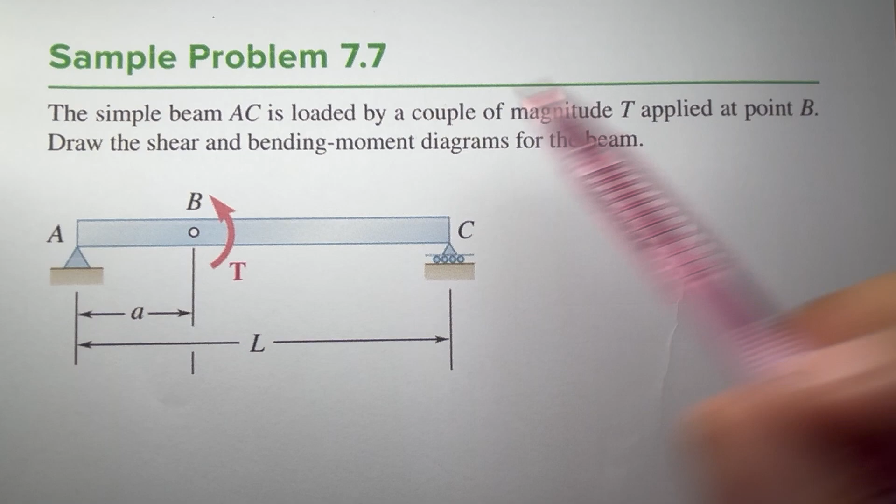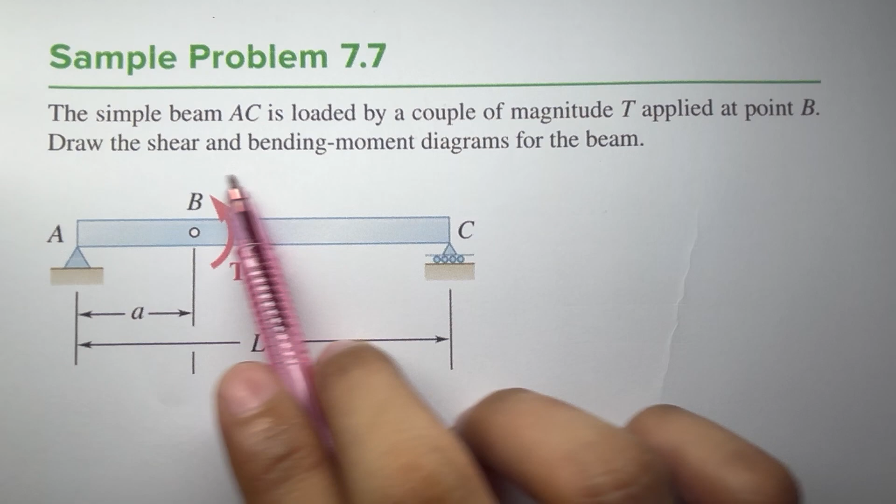Now let's have our last example. We have sample problem 7.7. We have a simple beam AC that is loaded by a couple of magnitude T applied at point B. Draw the shear and the bending moment diagram for the beam.

First we need to find the reactions at the supports. We have two reactions. We have no reaction AX here, since there's no force along the horizontal. So what we have here is just CY and AY.

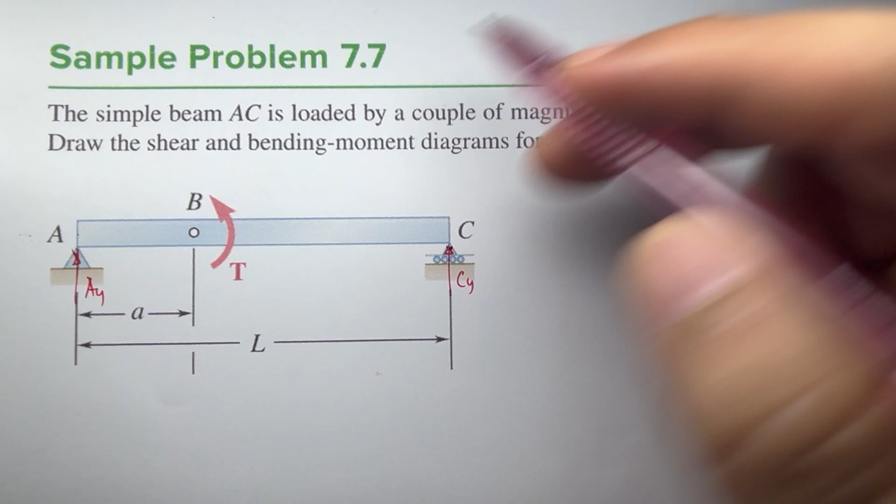To get CY, we can use summation of moment at point A. If we apply summation of moment at point A, counterclockwise positive, we have our T and also our CY, all positive. CY times its moment arm, which is L, is equal to 0.

Therefore, our CY is equal to negative T over L. Therefore, it should be directed downward.

How about AY? For AY, we have summation of forces along Y, positive upward. We have only two forces here. We have AY that is directed upwards, positive, plus negative T over L, equal to 0.

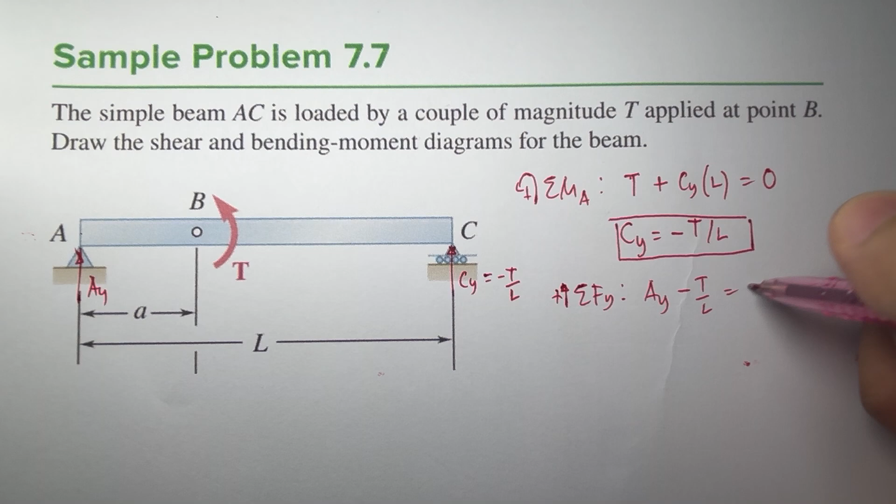Therefore, AY is positive T over L. So we have the correct direction of AY, which is upward. This is T over L.

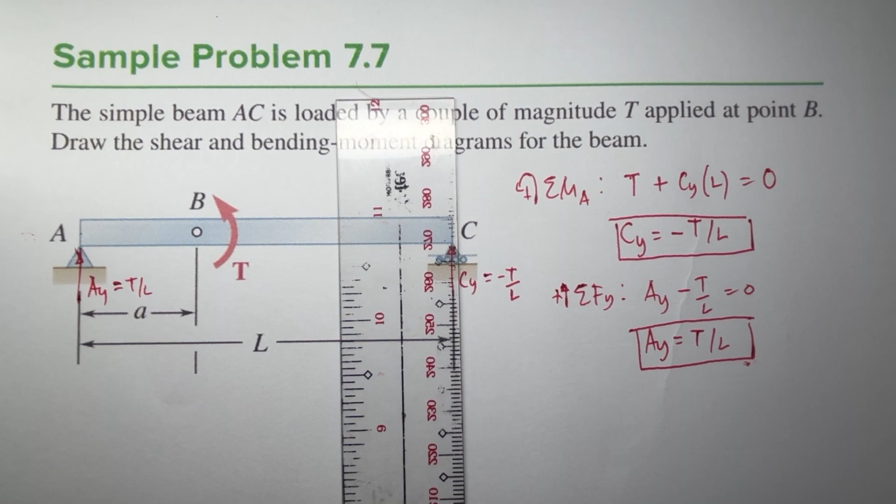Now, if we draw the shear diagram, we extend the lines from C, this one here also at B, and A.

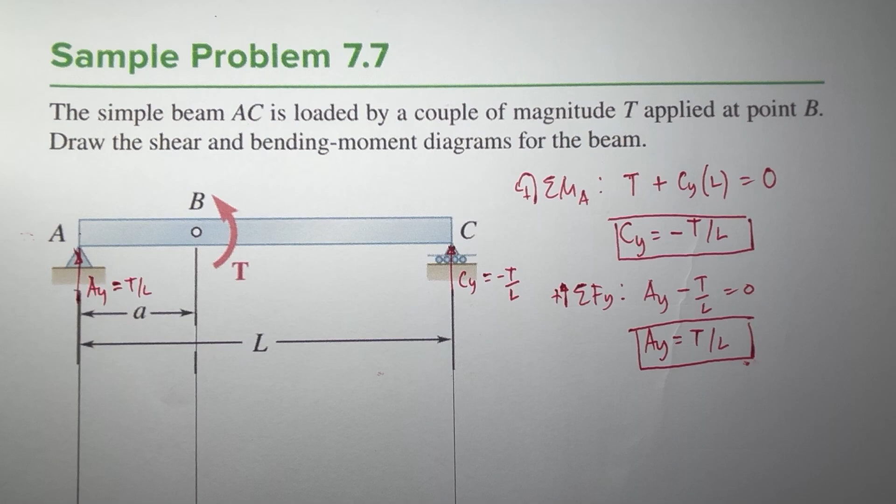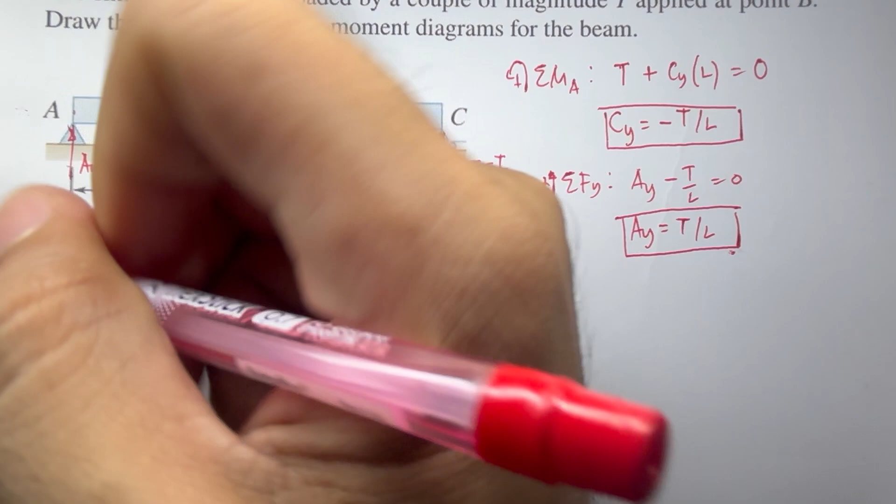So in drawing our shear, we have at point A a shearing of T over L. So we need to raise our graph by an amount T over L.

And from A to B, we have no load here. And B to C, we also have no load. So therefore, if we have zero load applied along the span of AC, the next graph would be constant. So all of this from A to C is just a straight line.

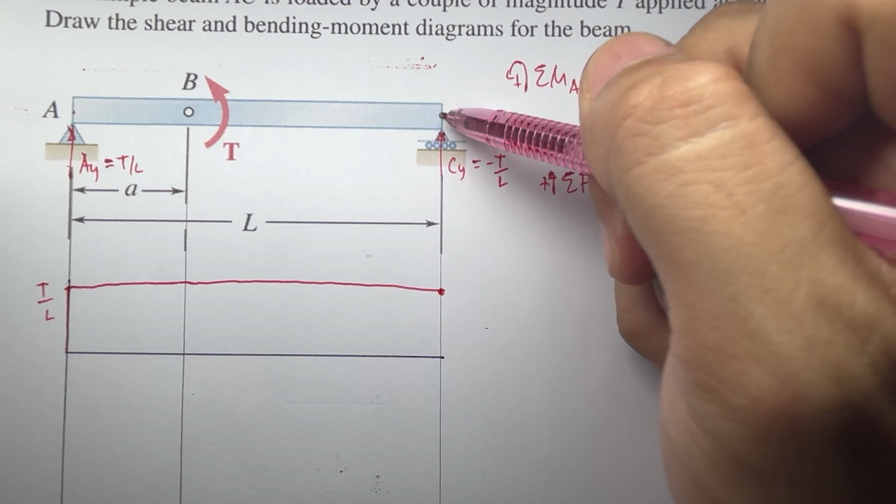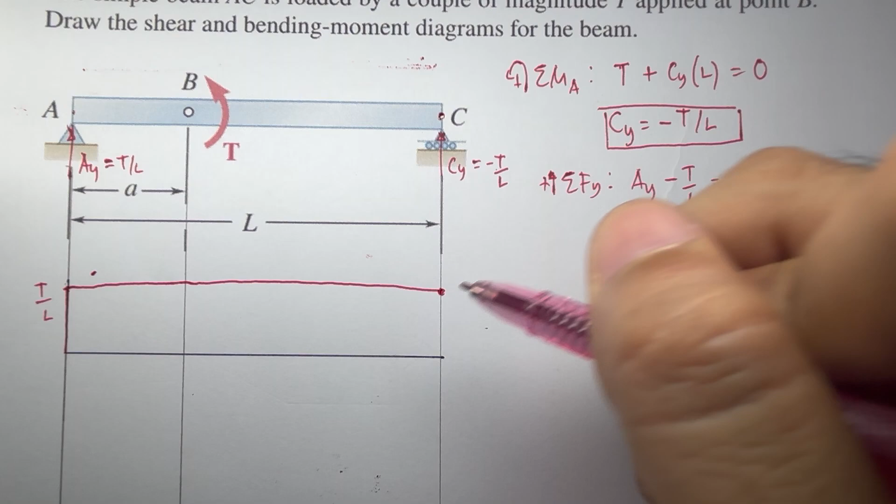Now, after we reach C, we have a downward force of T over L. So if the height of this one is T over L minus T over L, we go back to 0 again. So somehow this would be the graph of our shear diagram.

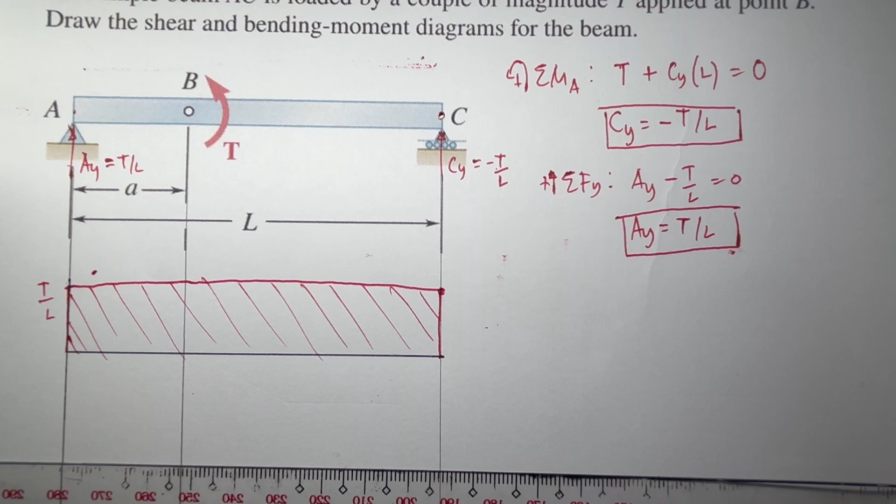Now, if we draw the moment diagram, looking at our figure, we have a moment at point B. So we have two segments here: A to B and B to C. Let's try to evaluate segment by segment.

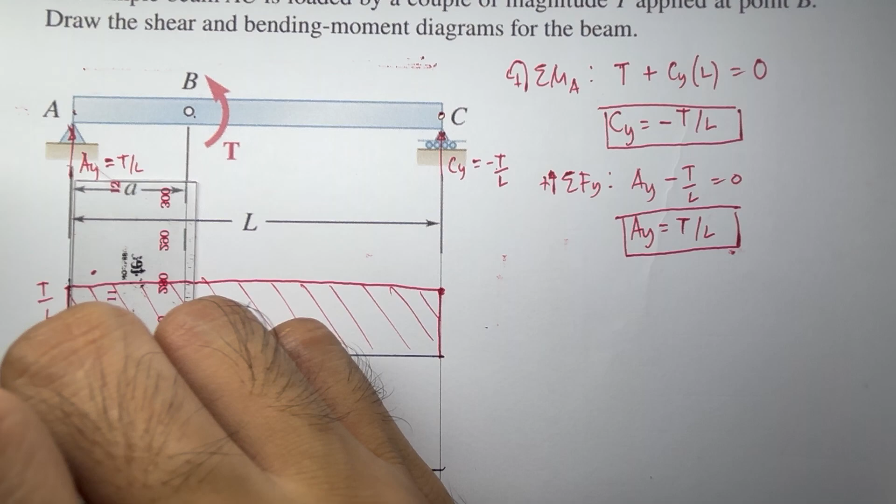So for the first segment, A to B, we have our formula as MB minus MA is equal to the positive area under the shear curve from A to B. If this is point A, this is point B, and here we have C, from A to B we project a line, so the area under the shear curve from A to B is just this area here.

What will be this area? This is just the area of a rectangle, that is base, which is a, times height, which is T over L. Since at point A we have no moment, our moment at A is 0, so we can cancel this out. This is equal to 0.

Therefore, MB is just equal to the area under the shear curve from A to B, which is a rectangle, that is base times height, or a times T over L. Therefore, our MB here is equal to, say, aT over L.

So somehow the graph would be this point here, somewhere located at this point. Say this is our aT over L. The upper right side, because this one here is positive.

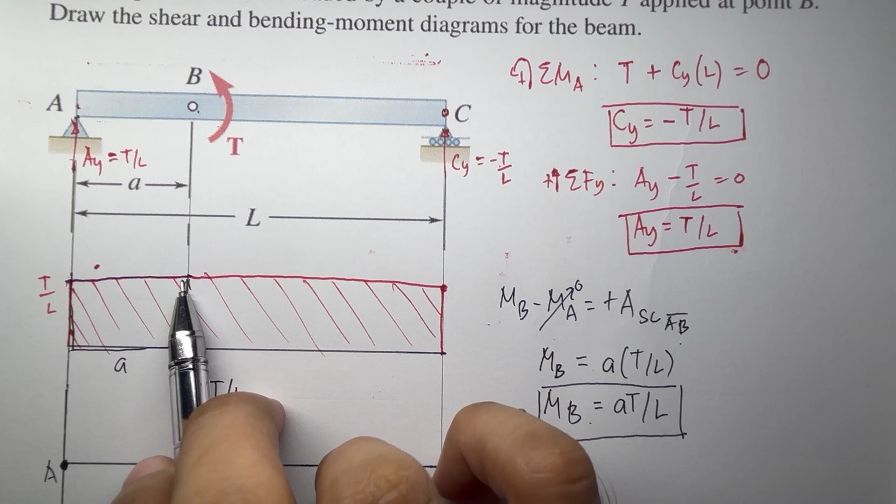Now, if we have a constant graph at the shear, the next graph would be linear. So if this one here is x to the power of 0, the next graph would be x to the power of 1, or simply a straight line.

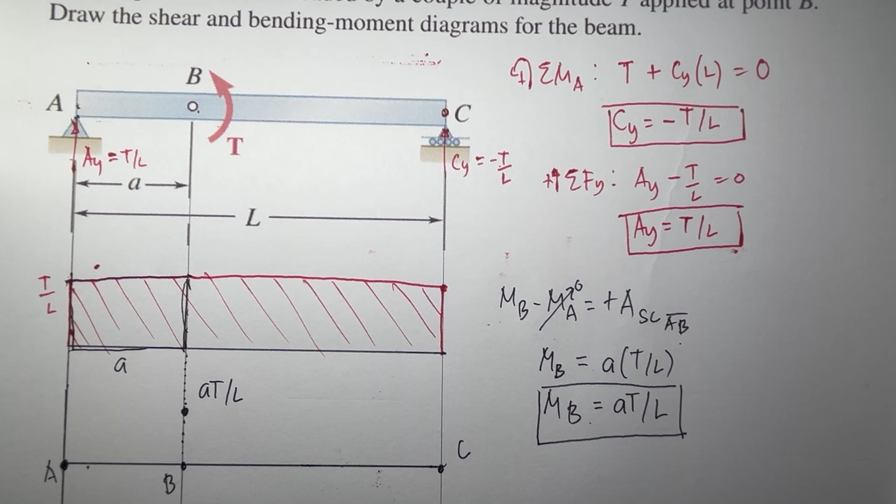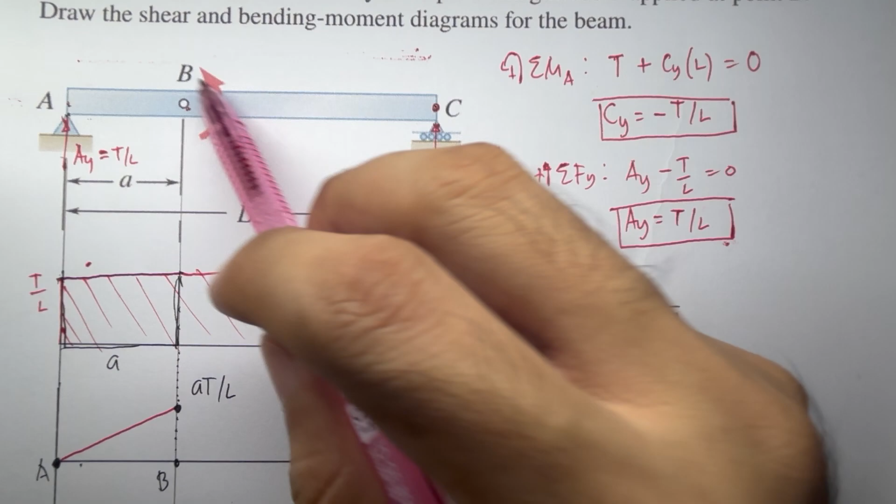Now, take note that at point B we have a counterclockwise rotation. If we have a counterclockwise rotation from our load diagram, what we are supposed to do is subtract this from our current moment MB. If we have a clockwise rotation, we need to add this torque or moment to our MB.

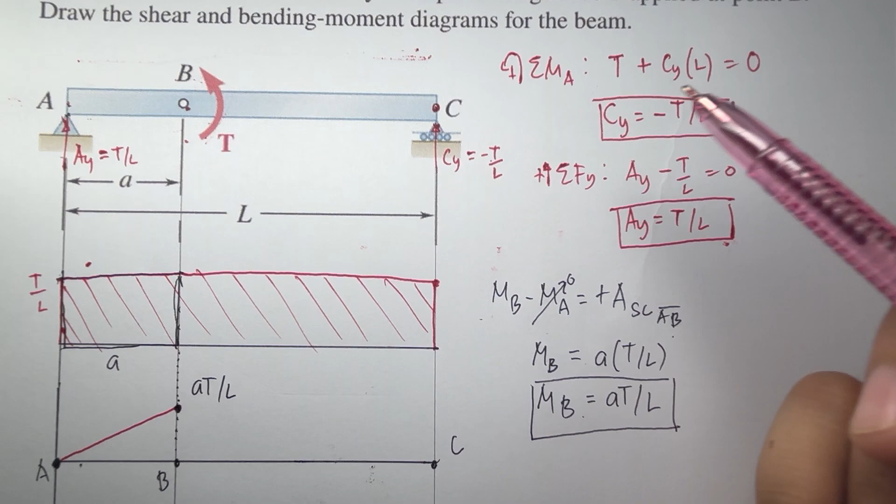So since this is counterclockwise, we have our new moment as AT over L minus our T. So we have somewhere, say, located at this point, this is AT over L minus T. So that's our graph here.

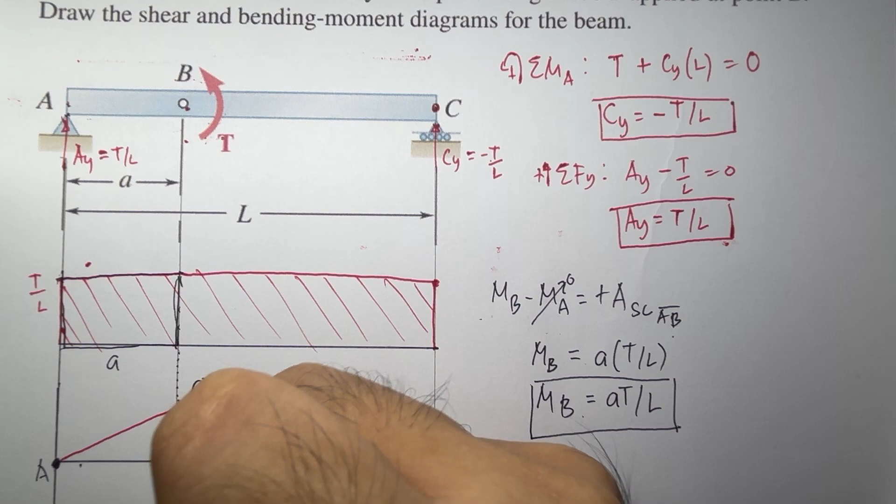Now from B to C, the formula would be the same. We have MC minus MB is equal to the positive area under the shear curve from B to C.

So MC minus our MB would be this new point, which is AT over L minus T, equal to the area under the shear curve from B to C, which is also in the shape of a rectangle. So the formula would be base times height. Its base is L minus A, times the height, which is T over L.

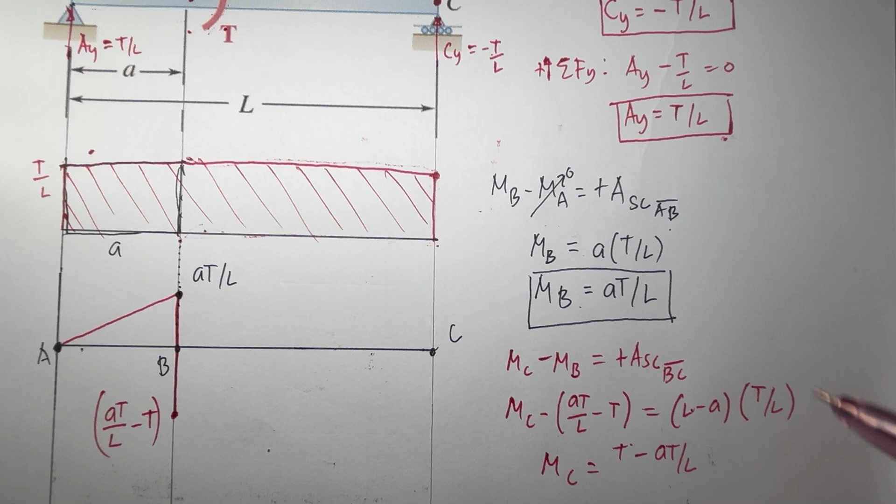So solving MC, we just distribute. We have T minus AT over L. And if we transpose this to the right hand side, we have positive AT over L and negative T. So this one cancels out, and this also. Therefore, our MC is equal to 0.

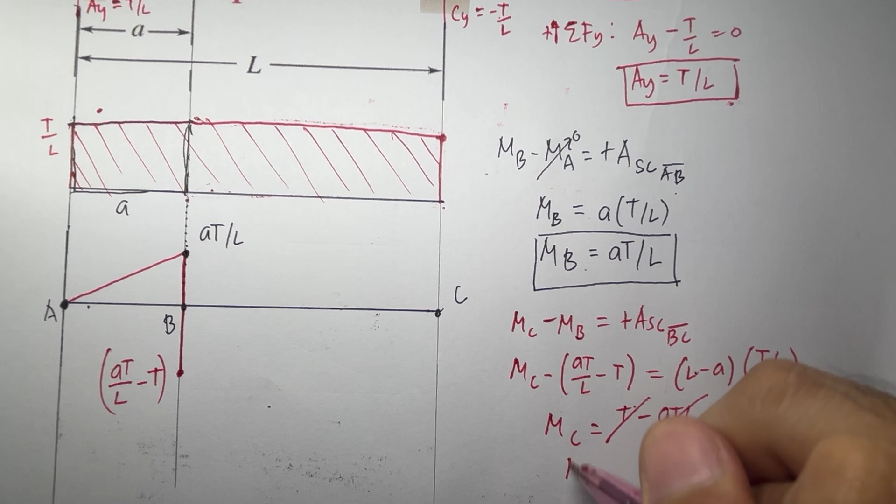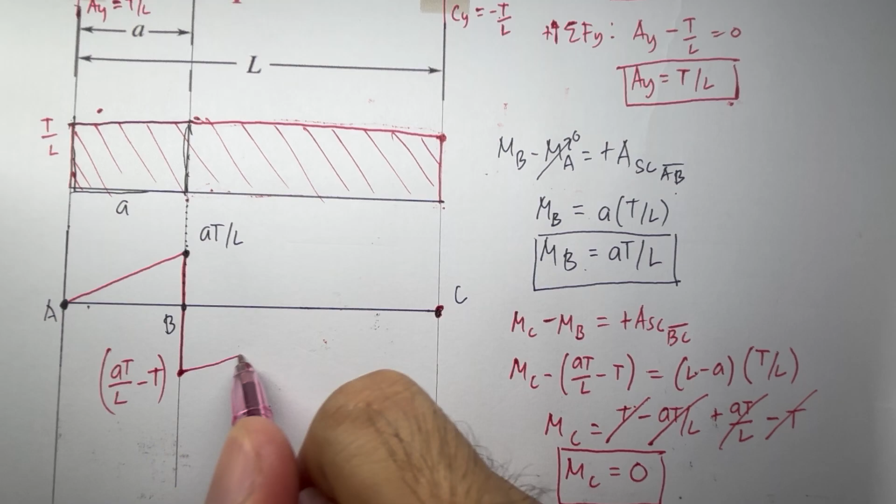So we go back to a value of 0. Since our shear curve here is constant, the next graph would be linear. So we just need to create a straight line. So this would be the curve or graph in our bending moment diagram.